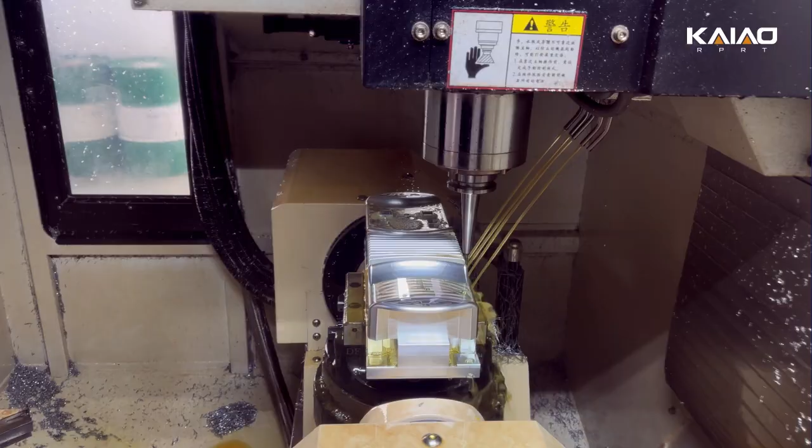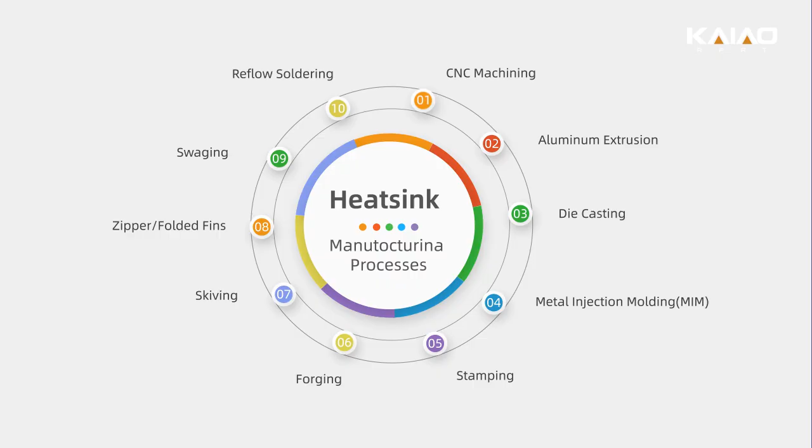In this video, we are stepping inside the factory to uncover exactly how a raw block of metal transforms into the ultimate thermal armor for your electronics. We'll explore everything from material choices to the 10 core manufacturing processes that make cooling possible.

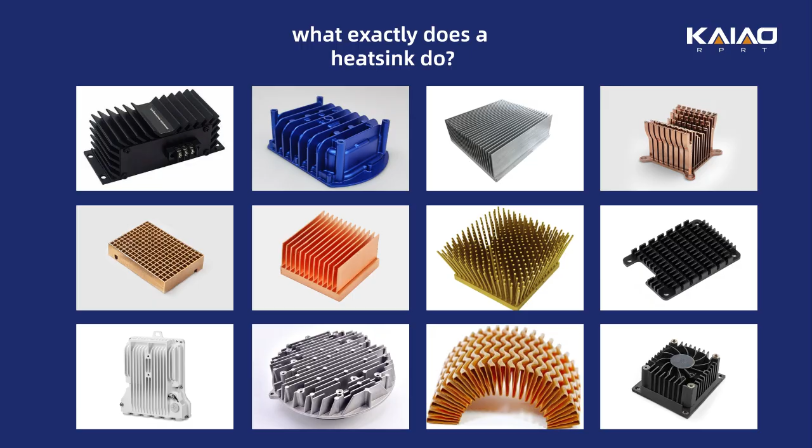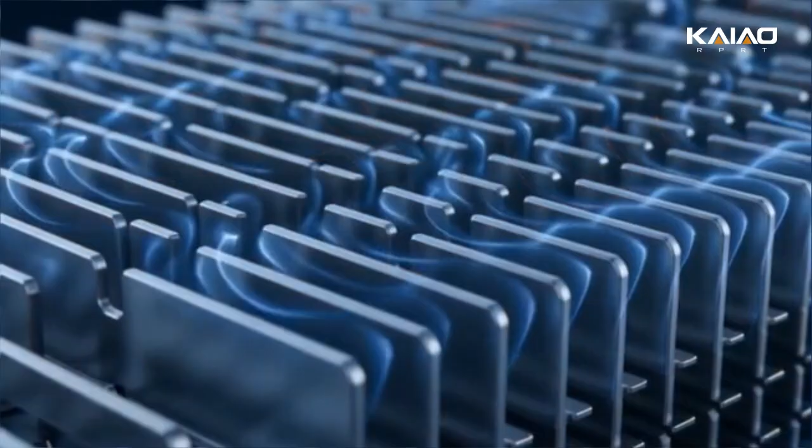So what exactly does a heatsink do? Its job is simple: pull heat away and expand the surface area. It takes the extreme, concentrated heat from a tiny chip and spreads it across a massive array of metal fins. By maximizing the surface area exposed to the air, heat sinks allow natural convection or fans to easily blow the heat away.

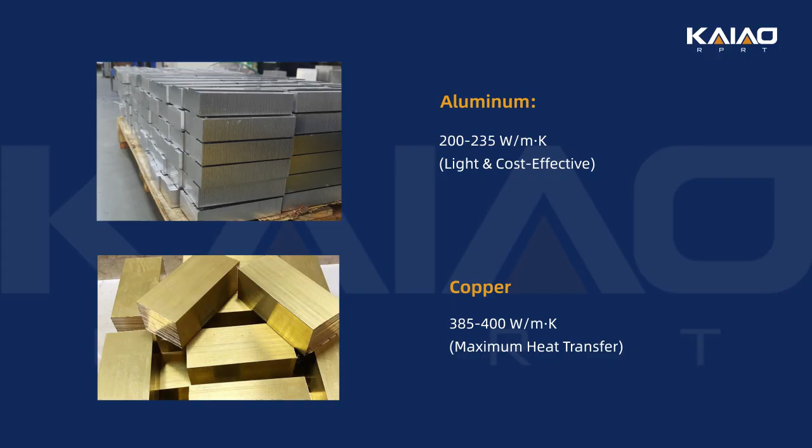The foundation of any heat sink is its material, and the industry relies heavily on two heavyweights: aluminum and copper. Aluminum is the all-around champion—it's lightweight, affordable, and easy to shape. Copper, on the other hand, is the thermal monster. It offers nearly double the thermal conductivity. It's heavier and more expensive, but when you are dealing with extreme power density, copper is irreplaceable.

Now, how do we shape these metals? Here are the 10 processes driving the industry. Aluminum extrusion: think of it as industrial toothpaste. It pushes hot metal through a die to create long, continuous fin profiles. It's cost-effective and perfect for mass production.

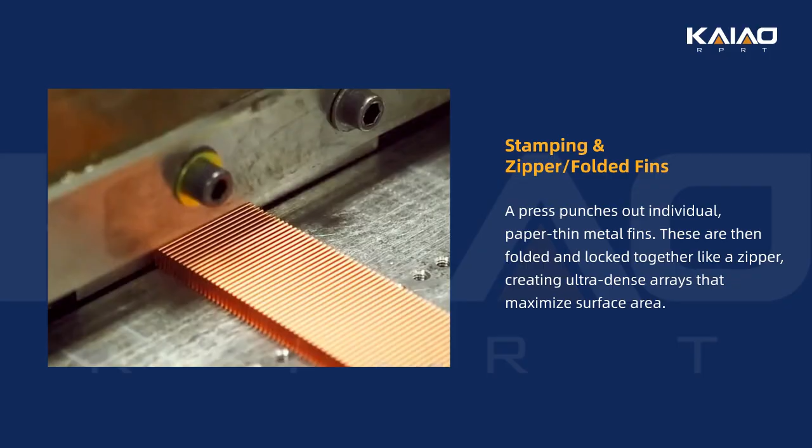Stamping and zipper-folded fins: a press punches out individual, paper-thin metal fins. These are then folded and locked together like a zipper, creating ultra-dense arrays that maximize surface area.

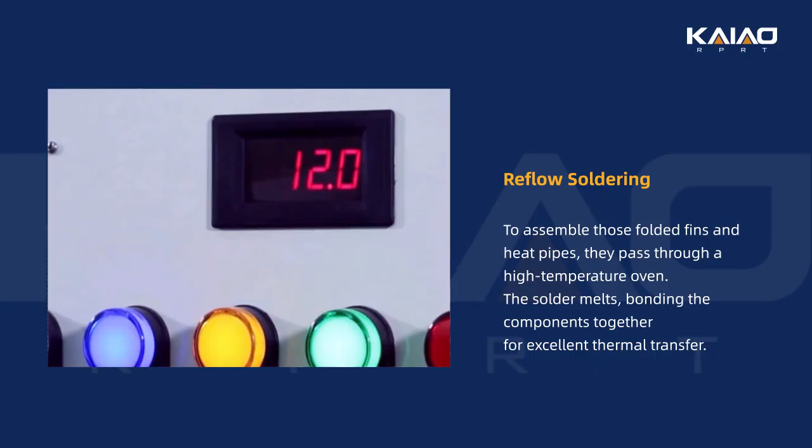Reflow soldering assembles those folded fins and heat pipes. They pass through a high-temperature oven, and the solder melts, bonding the components together for excellent thermal transfer.

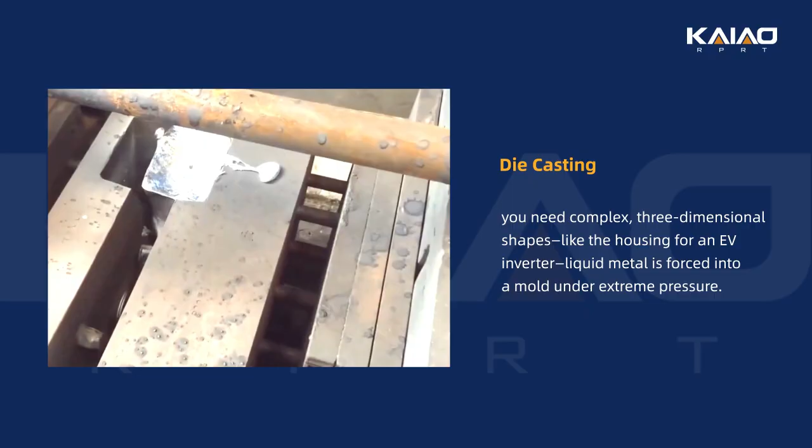Die casting: when you need complex, three-dimensional shapes, like the housing for an EV inverter, liquid metal is forced into a mold under extreme pressure.

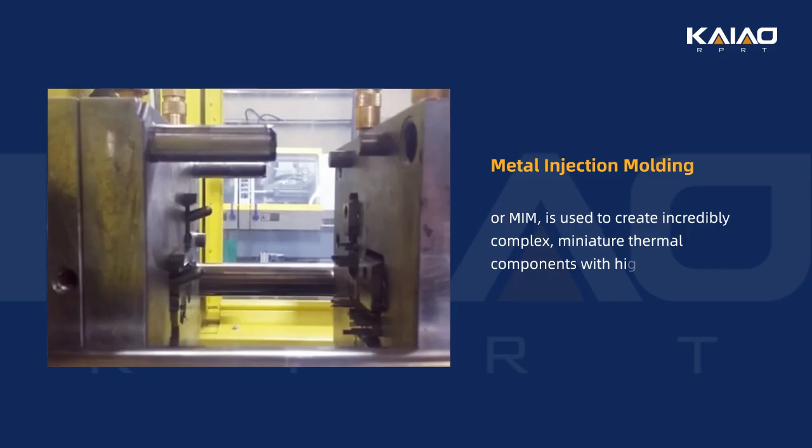Swaging uses brute mechanical force to cold press heat pipes tightly into an aluminum base. Metal injection molding is used to create incredibly complex, miniature thermal components with high precision.

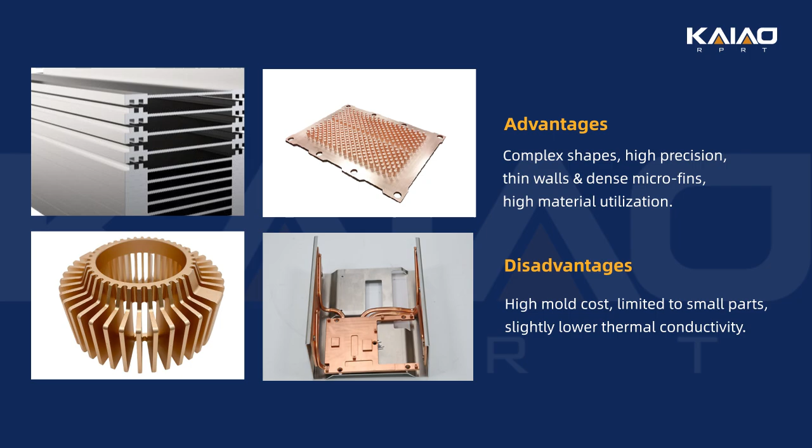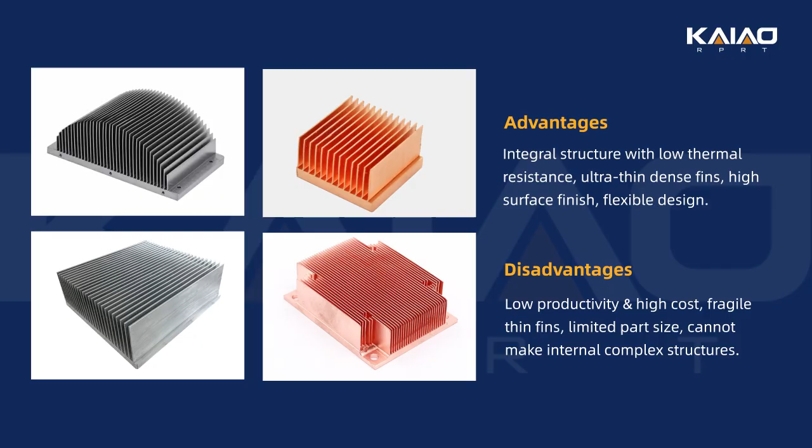Skiving—this is incredibly satisfying to watch. A sharp blade literally shaves thin fins up from a solid block. Since there are no joints or solder, there is zero thermal resistance between the base and the fins.

Forging: using hundreds of tons of pressure, metal is smashed into shape. This compresses the grain structure, making highly efficient, dense pin-fin heat sinks.

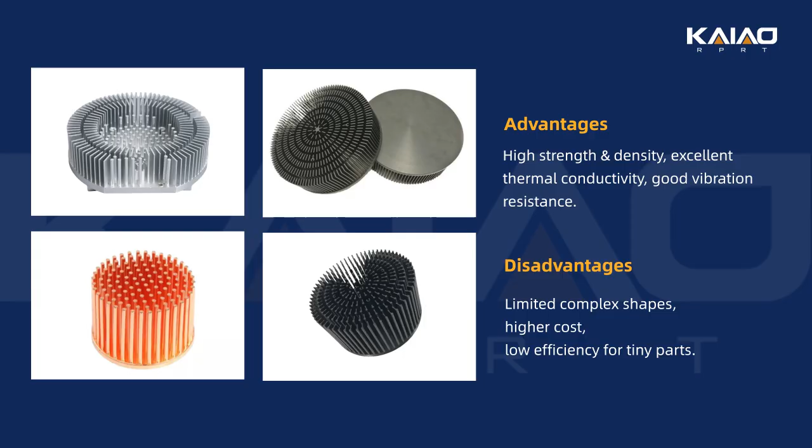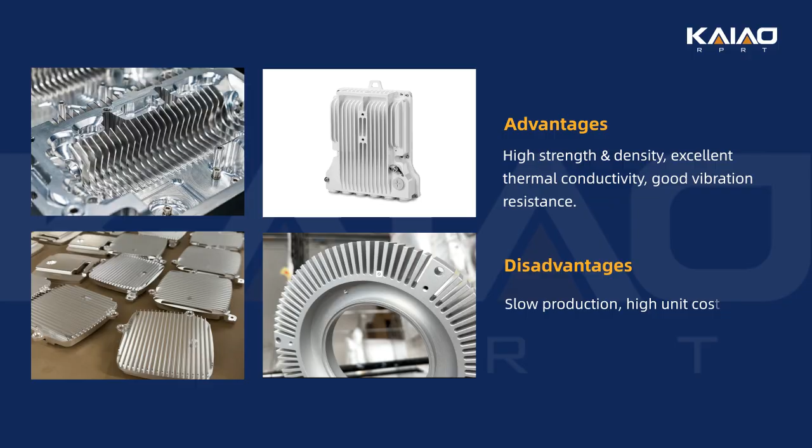CNC machining, for absolute perfection. CNC mills cut custom mounting holes and machine the bottom plate to a mirror-like finish, eliminating microscopic air gaps for flawless chip contact. But the raw metal isn't ready yet—it needs a final layer of protection: surface finishing.

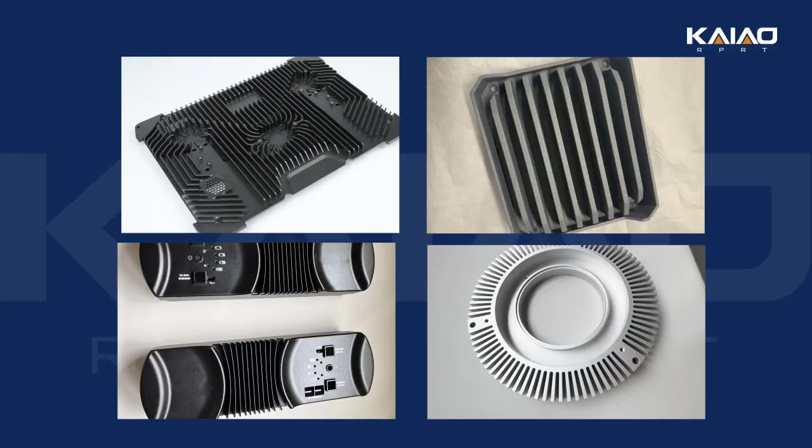Processes like anodizing and plating prevent oxidation and corrosion, while black anodizing actually boosts the metal's ability to radiate heat. For harsh environments, an epoxy powder coating or painting provides a tough, electrically insulated, and corrosion-resistant shield.